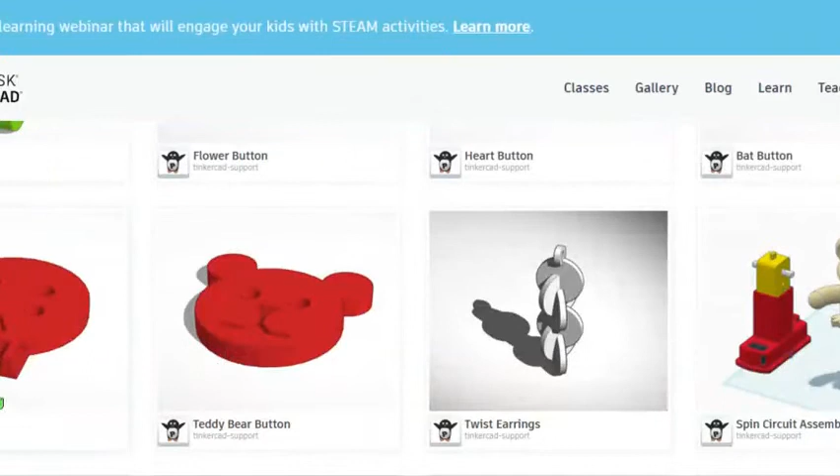There'll be many choices, and since it's a little bit shorter week and you're technically not having school on Friday, I'm going to allow you to choose any one of these buttons. They get more difficult as you go down the line. The skull and teddy bear, pretty challenging, and so on. Flower button, not terrible if you can follow the directions really close, but the basic button is what we're going to try, just to backtrack a little bit and make sure everybody's able to tinker a little bit.

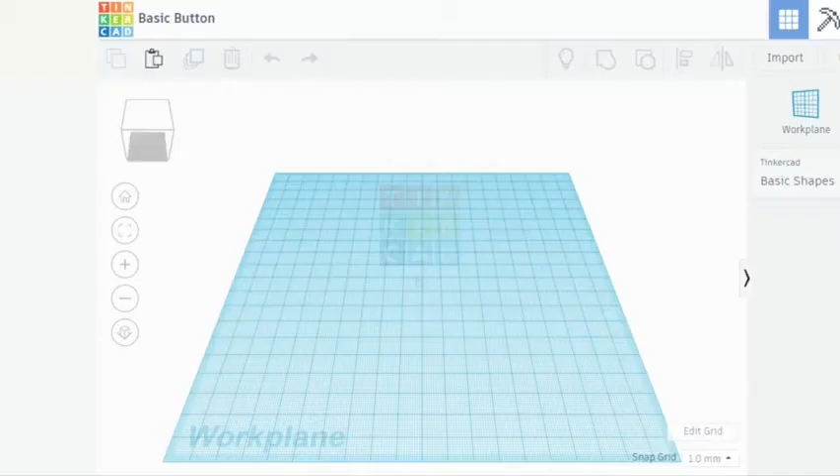I'm going to choose the basic button, and I have my lesson description right here saying I'm going to use some cylinders to do that, and I can start the project. Once it appears, on my left side, which you may not fully see in this video, I have my instructions on what to do. It says drag a cylinder, so make sure that on the right side you are in the basic shapes section. And off on the far right, I've got a cylinder here that I will bring in and try to place on the orange shadowed one.

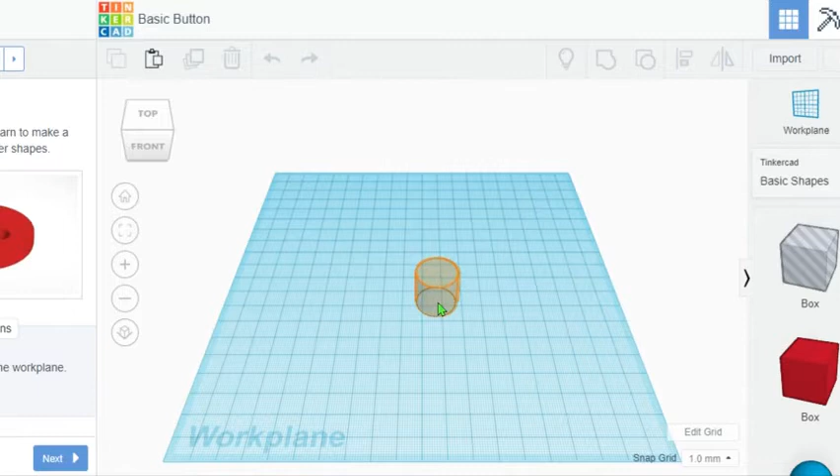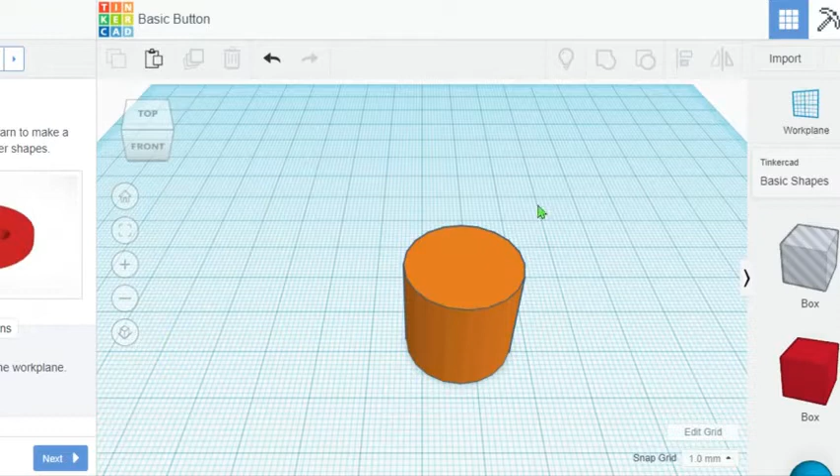If you'd like to zoom in, you can use the scroll on your mouse if you have a mouse attached, or you can use the plus sign right here, and you can kind of get yourself going. I'm going to switch this to flat view so I get a little bit better image of it. Now I'm going to go to my next step.

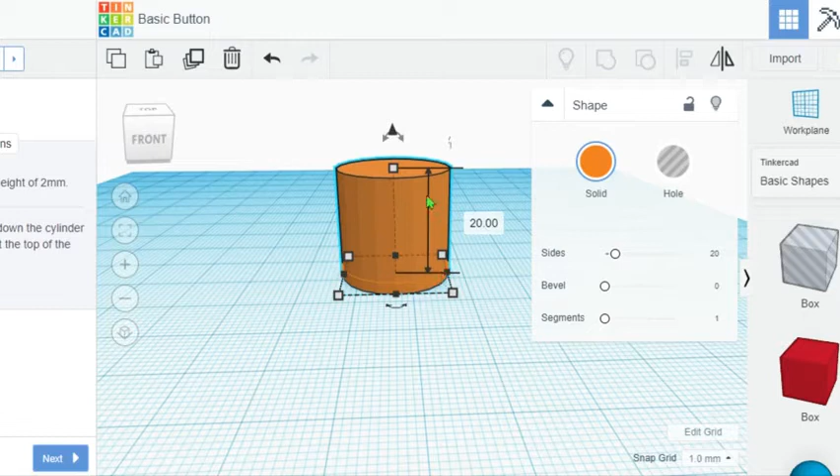It says scale this down to 2 millimeters. And in order to change that height, I kind of have to rotate this a little bit. So I'm going to bring it down. And when I click on it, you can see these various boxes. So I can change sizes here. If I select the white box near the top, it actually is going to give me a dimension from the bottom to the top of this. And I'm going to change this to 2 millimeters. Millimeters are kind of their default here. I'd rather do inches normally, but this makes it pretty simple. Now you can see it's thinner like a coin or a button.

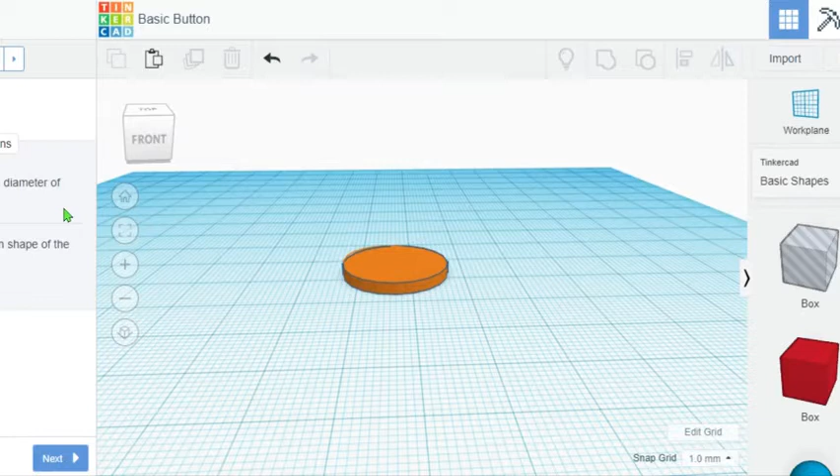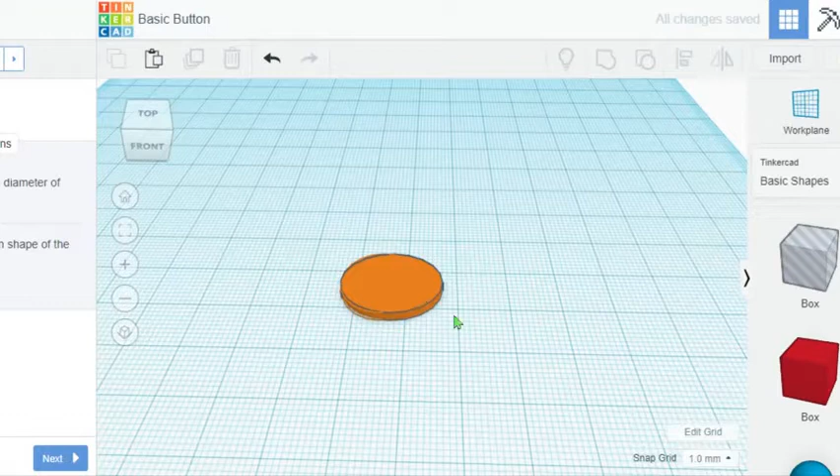Scale the smaller diameter to 16 millimeters. So I will click on one of those corner boxes. I'm going to change this to 16. Oop, actually, I'm going to make an edit. I'm going to change that back to 20, and I'm going to make this one 16 right there. And I'm just going to move it over. Well, maybe we should do both. For me, I'm going to move that right over where it wants me to be, and I'm going to zoom in a bit. I've got 16 by 16 for the diameter, and I can move forward.

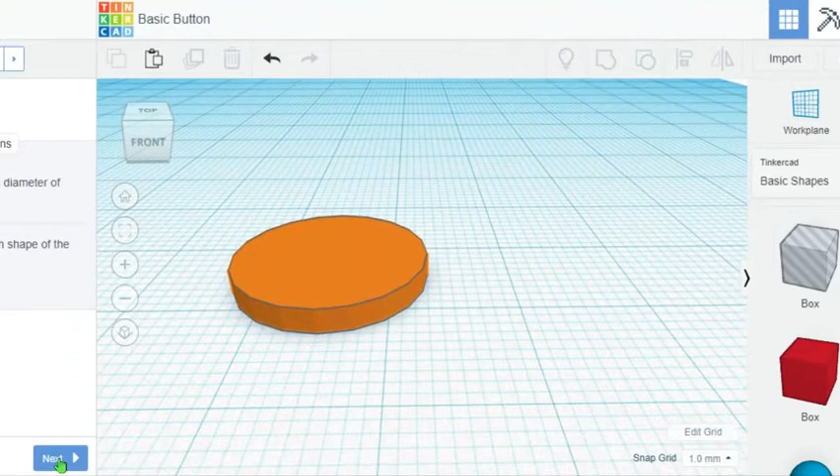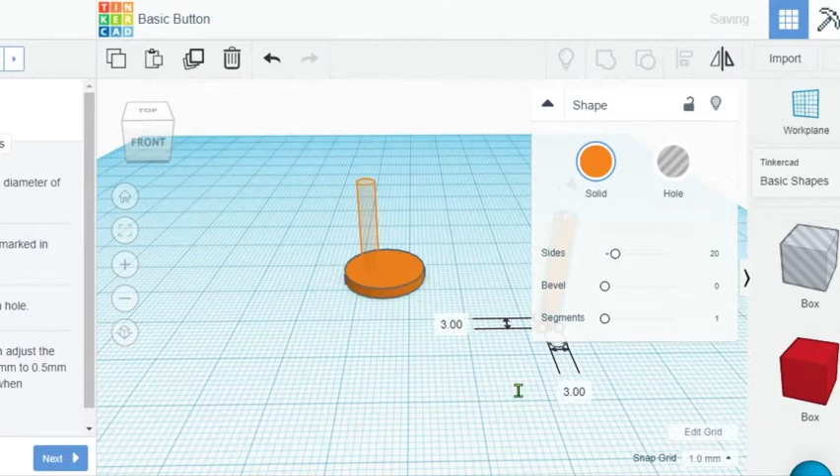Okay, it wants me to drag another cylinder in. You can see that it's going to go right there. I'm going to make the diameters of these 3. All right. And now that I've got those 3, we're going to make this cylinder a hole. I'm going to change my snap grid on the bottom here, if you look at the bottom of your graph area, to 0.5 millimeter, as it says in the instructions, so that I can get it to place right where I want it.

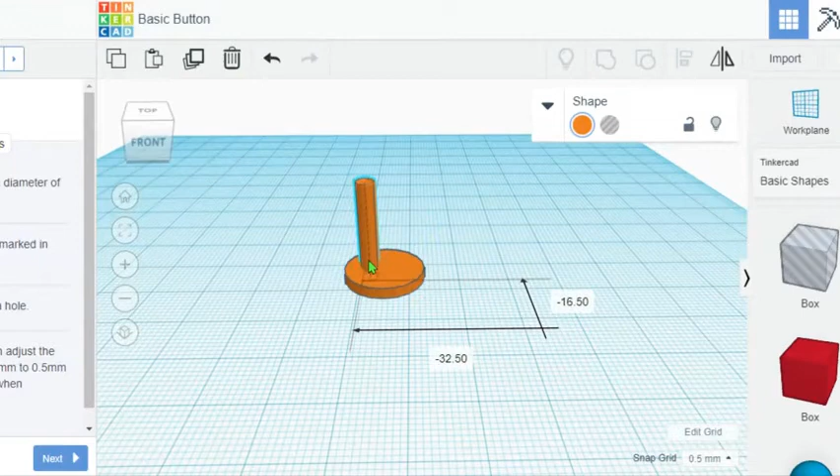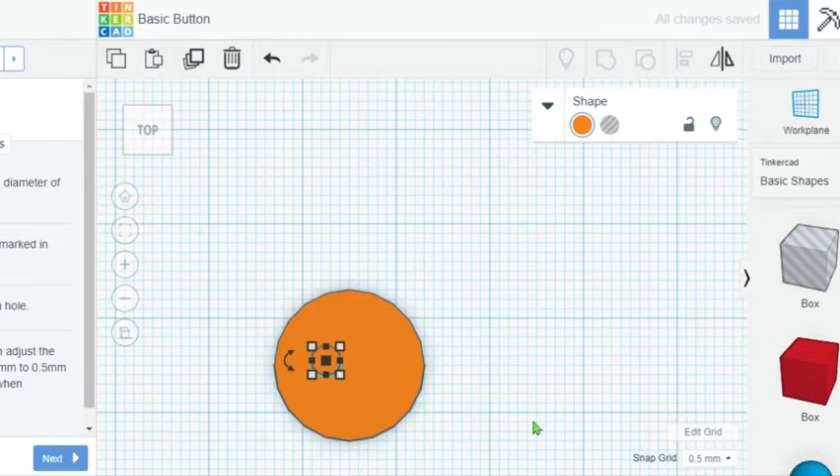When I zoom in over here, you can see that with the arrows on my keyboard I can get it placed better. If I want to look at the top, I can go up here to this little cube. I can click on top, and I'm going to switch back to perspective view like this, or flat view, and I can see if I'm where I want to be. Okay.

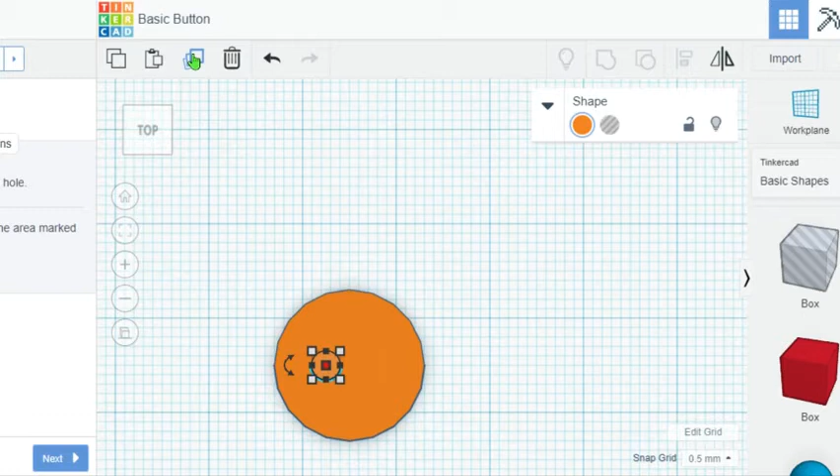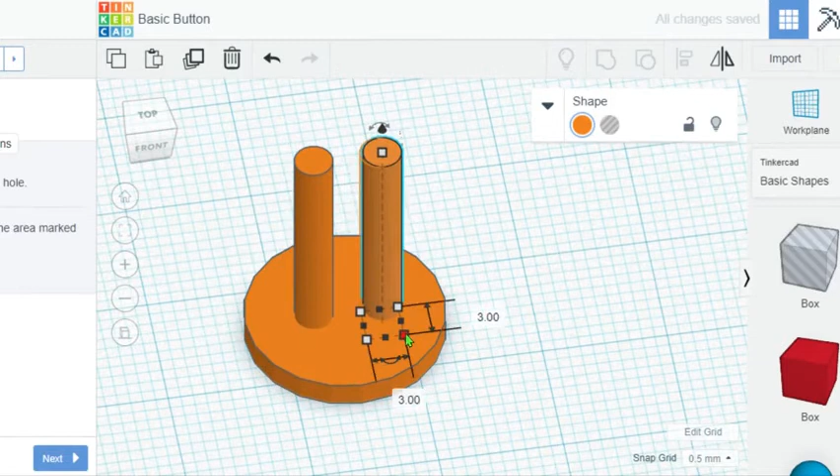And I am going to copy and paste this. I can do that a couple of different ways. I can go up to duplicate right here, and it will make a second one that I can drag over. Let me try this again. There. And I can place it. Or I can use Control D to duplicate as well. And I might just change my snap down a little bit more. That looks better. And you can see where those buttonholes are now. I'll just pull that over there.

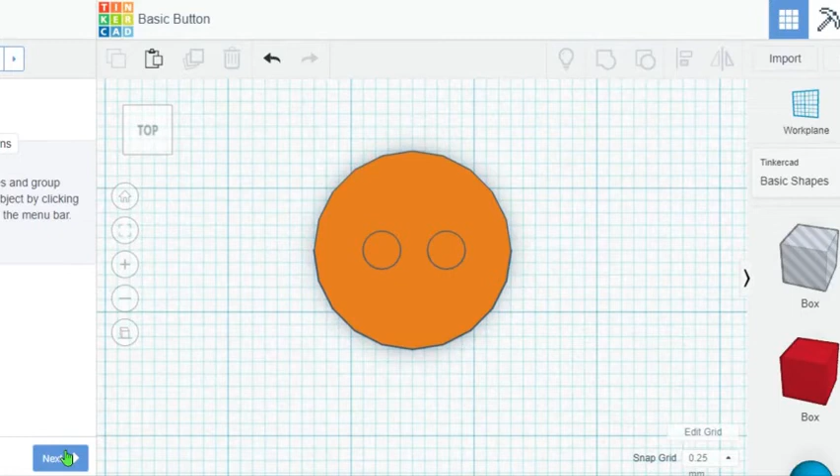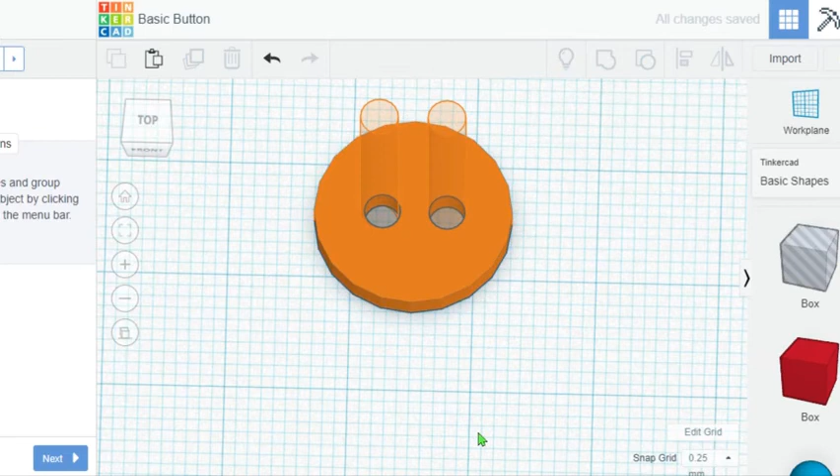Okay. I'm going to select the two of these as holes. So I'm going to make that a hole. I'm going to make this a hole. And then I'm going to highlight or drag and group all of these. And when I merge them up here, it will take that set of cylinders that were really tall and turn them into holes. So it's pretty basic right there. And I think I get a little congratulations. It's not a very difficult one.

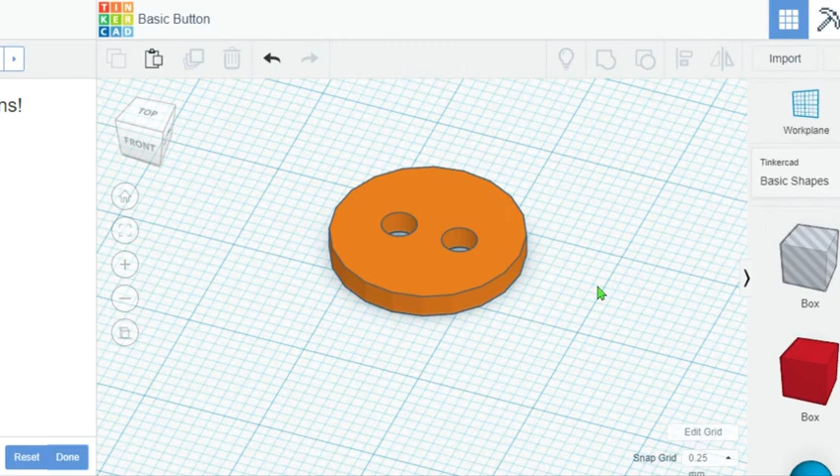You're trying your best to get this located in the right spot. And it's just kind of an intro, something that I probably should have done first. So we're backtracking, like I said, live and learn. And now you've got a button. If you want to embellish your button a little bit, you can do so. Just make sure it still looks like a button with holes in the middle so that thread could go in it and it could be used on a piece of clothing. At this point, you don't have to do anything else, and it will be checked in for me in a few days. All right.